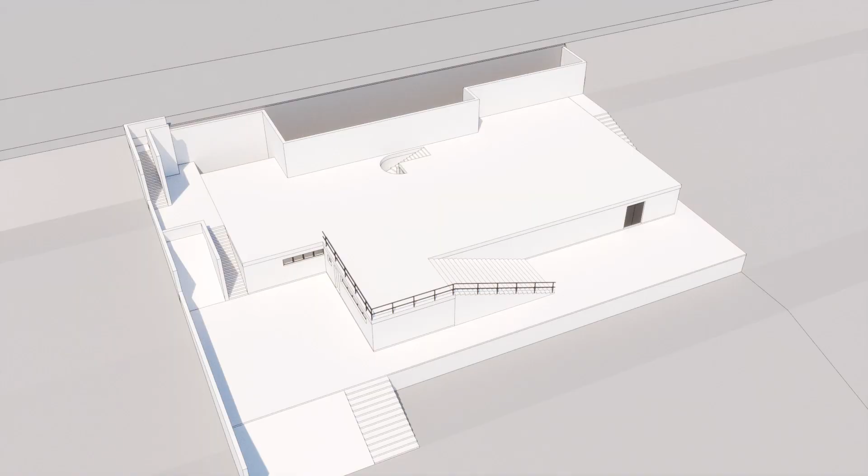With an unlimited budget from the client, this housing project represents the opportunity for the German architect to put his architectural and design ideas into practice. The Villa Tugendhat, built between 1929 and 1930, will provide a combination of the use of the open plan with more restricted spaces within a domestic use.

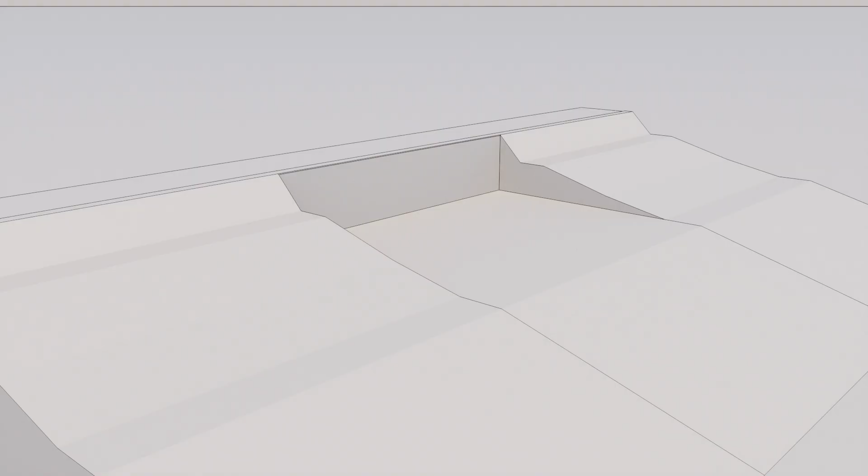The land is located on a steep hill, which descends abruptly. The footprint of the construction is displaced on the highest part. The architectural program is divided into 3 levels. The main entrance, the garages and the bedrooms are located on the upper floor at street level. The remaining floors are sunk into the terrain to suit the topography. The lower level houses service spaces and functions as a base in the composition of the rear facade.

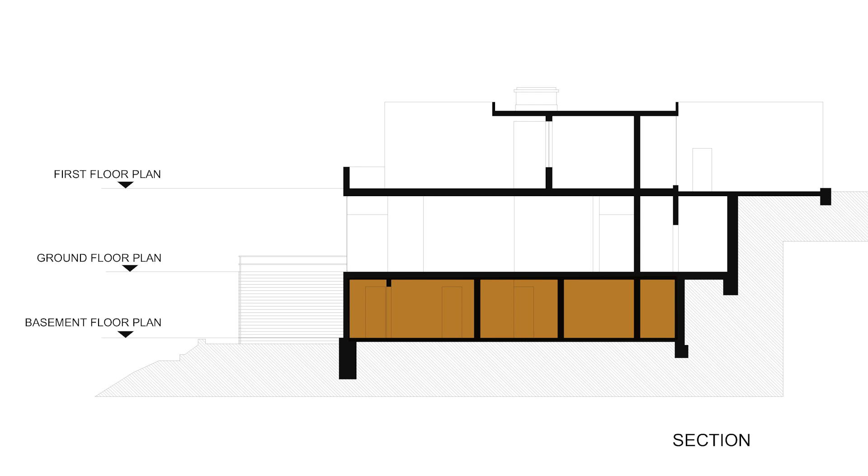The intermediate level is made up of the social area of the project. By the border adjacent to the street, the access to the house is located, which is aligned horizontally to the road.

A single-level volume is perceived, topped with flat roofs and white walls. A facade of modest proportions and an almost industrial character rises.

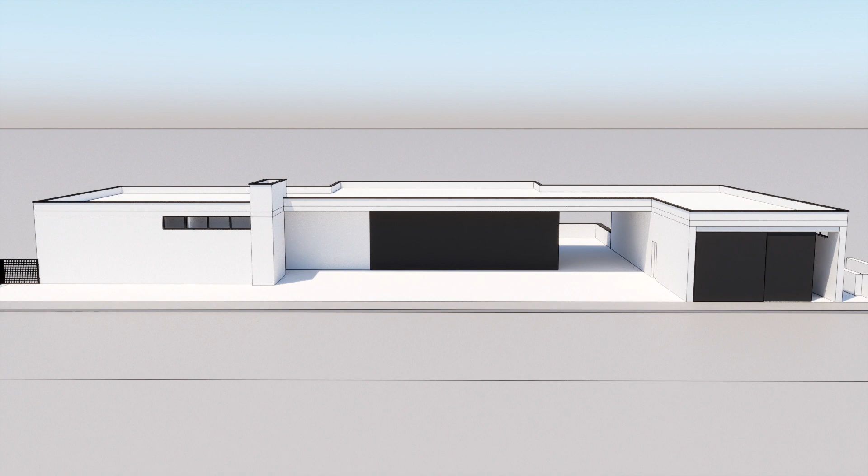In its central section, the building folds back from the street, projecting the ceiling onto a curved white glass wall, leading towards the entrance end, at the same time, creating a framed opening that offers a spectacular panoramic view of the center of the old town, the cathedral and the castle of Spilberk.

This view is flanked by the garage on the right, and a building mass arranged parallel to the street on the left.

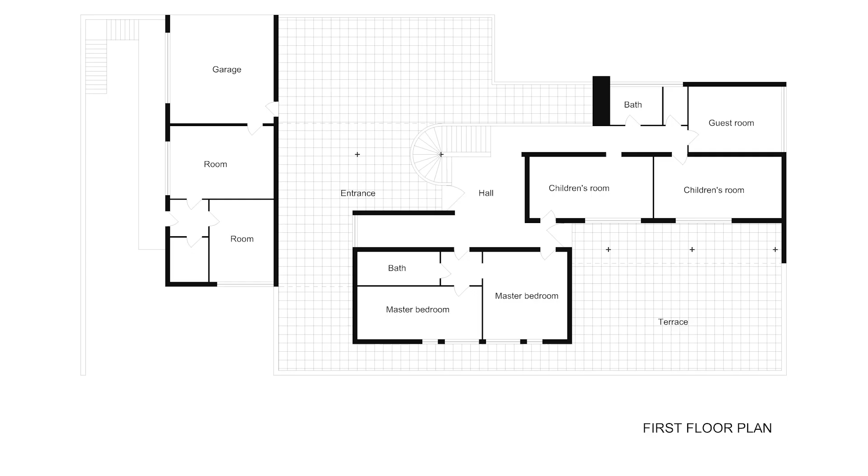Upon entering the house, on the upper floor, the user finds himself in front of a large hall, traditionally used to receive guests, before formal access to the house.

The floor is covered with large pieces of travertine. The doors, made of rosewood, extend from floor to ceiling and the furniture of a living room is arranged.

The hall connects with the private area of the house, made up of the bedrooms, which are confined by means of conventional divisions.

The bedrooms have exits to a large terrace, where magnificent views of the city are appreciated.

At the same level, a flight of stairs follows the semicircular path of the white glass wall, to descend to the social area of the project.

At the foot of the stairs, the view opens dramatically to a wide horizontal space of height and a half. The huge glass plates of the floor-to-ceiling windows create a striking impression that this space is completely open to the outside. The living room becomes an open terrace.

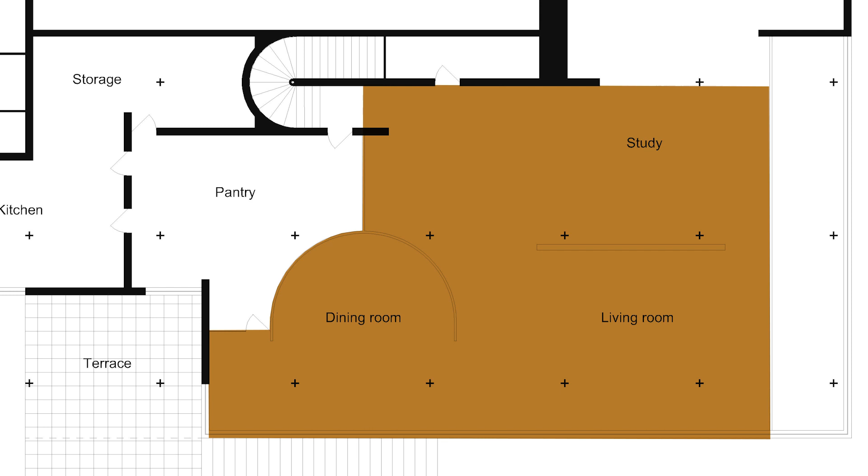The spectator's vision will focus, by downplaying the close-ups, on the panoramas of the city and the countryside. The large volume freely integrates the living room, the dining room, a work area and the library, in a single space. A greenhouse flanks this room on the northeast side.

The areas are only divided by a large onyx plate, which goes from floor to ceiling, arranged in the longitudinal direction of the house, and which delimits the living room from the work area, and by a semi-cylindrical screen covered with Macassar ebony, which protects the dining room from the rest of the space.

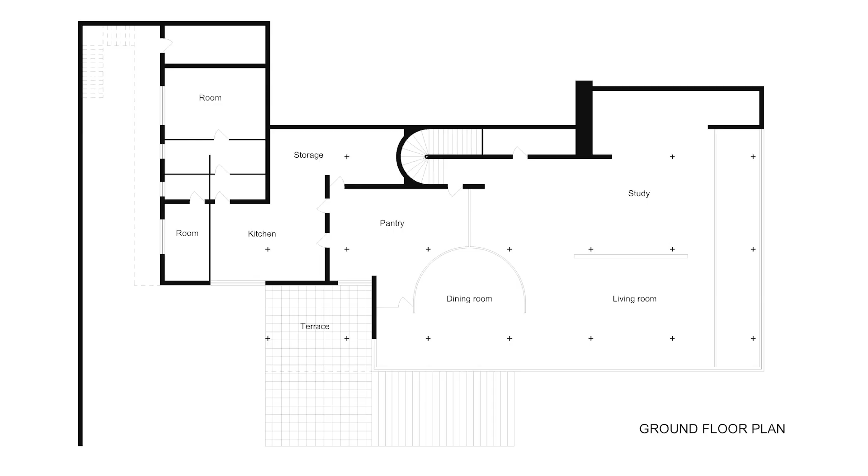The library with built-in shelving and seating is arranged in the northeast corner of the floor and remains open to the living room behind the onyx wall. Complementing this level, the kitchen, a pantry and service areas, delimited by fixed and conventional divisions.

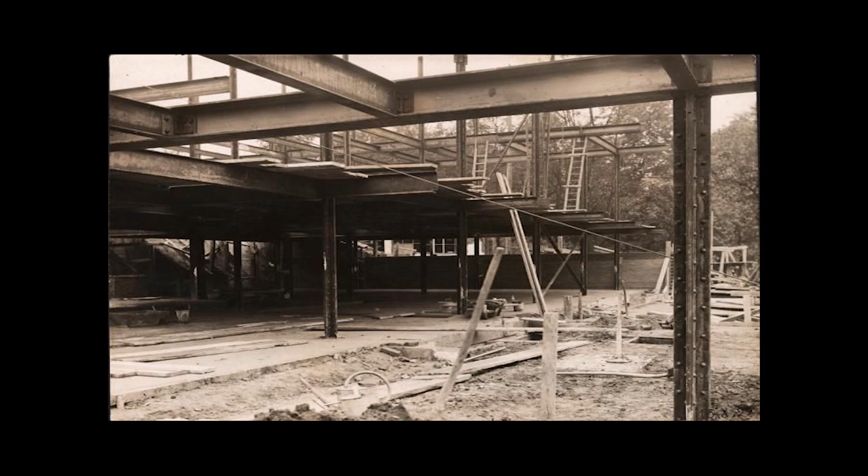The use of steel structures in private homes was rare at the time. At Villa Tugendhat, Van der Rohe creates structural frames that span the 3 levels of the house, which are built on reinforced concrete blocks, attached to a huge retaining wall.

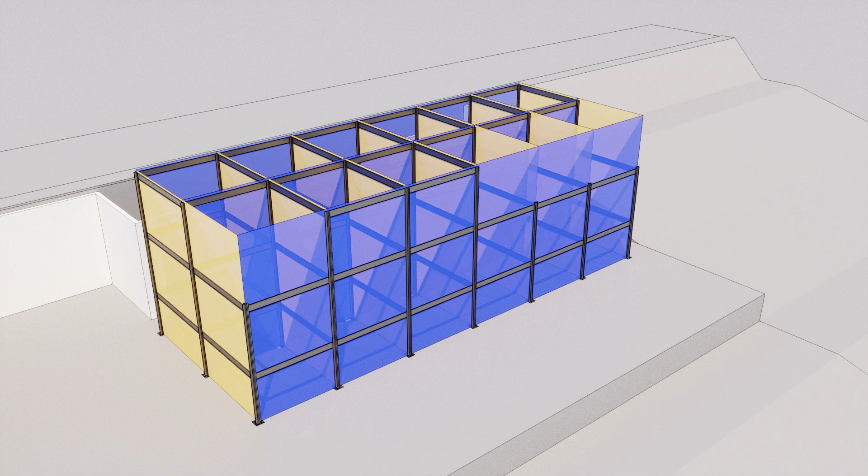The structure is divided into 7 longitudinal modules and 3 transversal modules. The load-bearing beams are arranged perpendicular to the longitudinal axis of the house. The columns are made of steel angles, riveted in such a way that a cruciform section is created, and they run the entire height of the building.

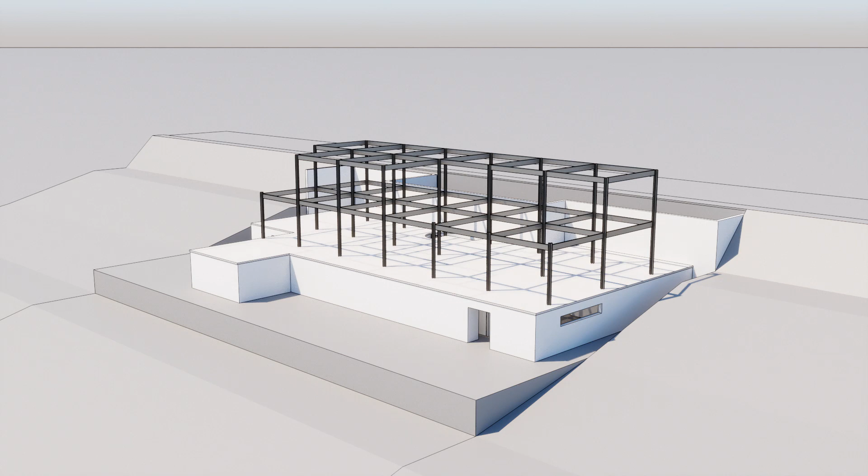This structure allows the distribution on each level to be flexible and completely independent from the rest of the floors. Despite such freedom, only the large volume of the social area assumed the form of an open plan. Both private and service areas were more conventionally defined as rooms.

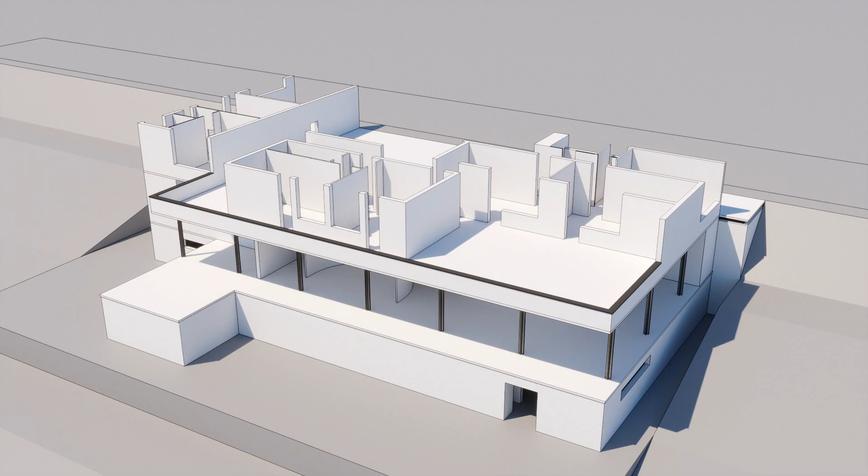The cruciform columns are projected to be exposed in the social area, where they are clad in a chrome finish. On the upper floors, Mies located the walls to hide the columns, against which the owners feared to collide.

Although the open and fluid spatial continuum of the public areas will establish the identity and reputation of the house, its formal and spatial order was in fact hybrid.

The slender steel columns mark the space of the large volume, but are barely legible as a structural grid. They serve more as a visual counterpoint to the walls and as objects in space that help the eye gauge depth. Its cruciform shape and chrome coating further undermine the ability to understand its materiality and structural role.

This gives the impression of a magical suspension of reality, of an ethereal and dematerialized space floating on the edge of the valley.

The continuity of the bay windows along the south and east elevation, along with the reduction of the frames to their minimum expression, as well as the presence of a huge weeping willow tree beyond the building, further emphasize the dramatic effect.